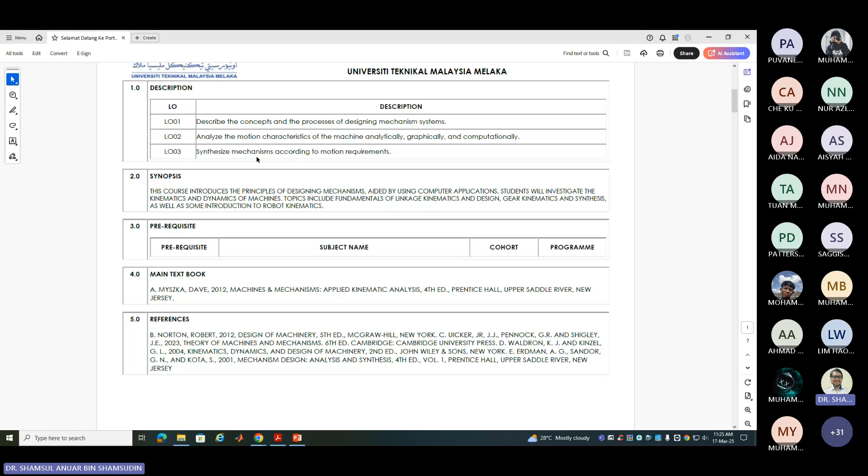Okay, nanti kita tengoklah what examples of mechanisms, and then you must be able to analyze. So analyze will involve a lot of calculations. So this is based on the motion characteristics of the machine, and you use several methods to be able to do this via analytical method or graphical method and also computational method. Okay, computational method will involve that you use computer lah, but nowadays maybe even your handphone or tablet can also do the work.

Okay, and the last LO is for you to be able to synthesize mechanism. So synthesize is another bombastic word for design, for you to be able to design the mechanism. Okay, so usually you are given ready-made mechanisms or mechanisms that already exist. So you analyze. But later on, at the end of the day, if you have already understood how to analyze it, you must be able to try to create a mechanism that will achieve what you want the machine to do. So that is the end game for learning anything.

So first, you must be able to just follow the recipe, and then finally you can create your own recipe. So that's the situation in any class or any knowledge. Okay, so as for the synopsis, I guess you can read. It involves some of the topics that we want to study, and I guess let's go down to some other stuff like maybe assessment. If I can get this thing to move, because this is a fairly old computer that I'm using, so it doesn't cooperate that instantly. Take its own sweet time to follow my instruction.

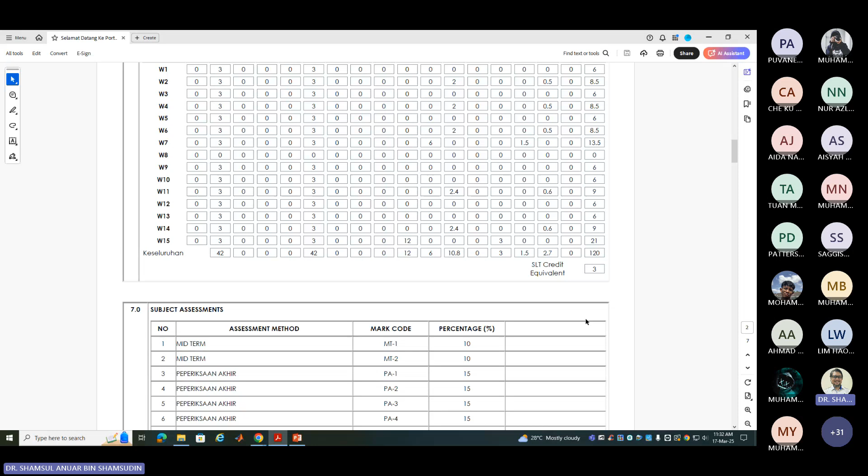Okay, so this is a 3 credit hour course. So our lecture is usually around 3 hours per week, but usually it's less than that. But like I said, you still need a lot of time outside of the class, outside of our meeting, for you to be able to understand the material.

Okay, for assessments, basically we have one midterm test, and in that we have 2 questions, giving a total of 20% for that midterm test, mid-semester test. And then we have this final exam where you get 5 questions and you have to answer 4. So that would be 60%.

And then I'll give you a bunch of assignments for you to enhance your understanding. So I think if you are able to do the assignment or the homework, I call it homework, that should prepare you to answer the questions in the test and also the final exam. Okay, I think that's the deal that I want to give to you. So is that a good deal or not? I hope it is. Okay.

Next, we want to talk about the planning. Like they say, failure to plan is planning to fail, something like that. Okay, but this is just a rough estimation, rough planning. We'll try to stick as close as possible to this plan, but there can always be some changes here and there.

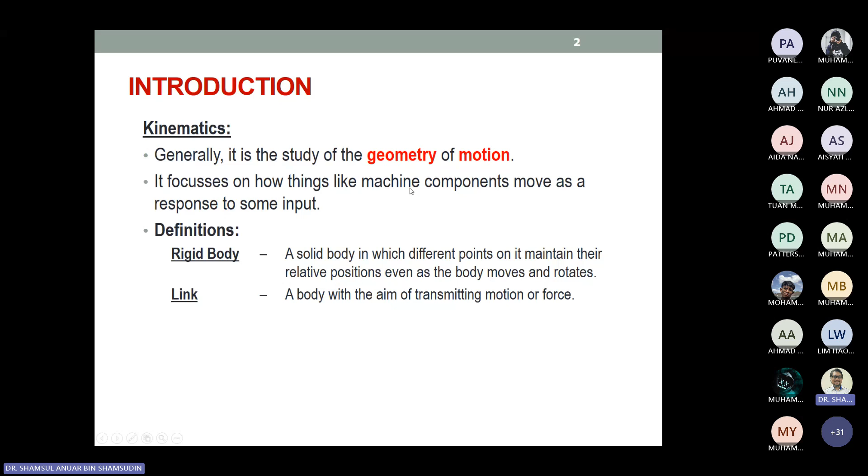Okay, so like you see, the term mechanism here is a little bit different from kinematics, but like I said, they are also used interchangeably. So sometimes you don't know which one is which, but basically they are talking about the same thing. But kinematics will put more emphasis on the geometrical mathematics of it, whereas mechanism will look at different methods to understand this thing and also to design it. Okay.

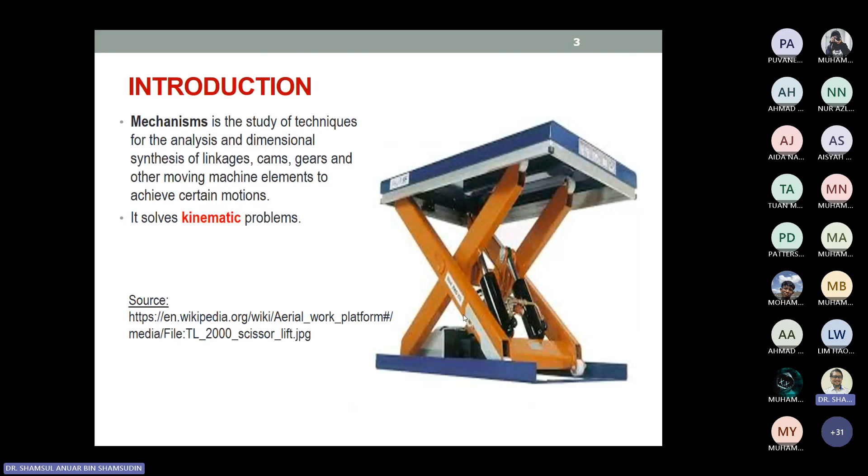Then we have this. Okay, so what are mechanisms? These are some examples. That one is also another example. So any machine that moves, or maybe you don't see the moving parts because they have a cover, like your car engine. You don't see the piston moving inside it, but if you uncover it, there are a lot of moving parts inside. So that means it is a mechanism. So all these are subsystems of the mechanism.

Why do we study linkage mechanism first? Not because it is easy. It is not easy. Therefore, I guess a lot of schools kind of avoid this topic. But in actuality, you see a lot of this in engineering work. So we don't want to have our graduates not equipped with this knowledge. So you want to be able to realize that this is important stuff.

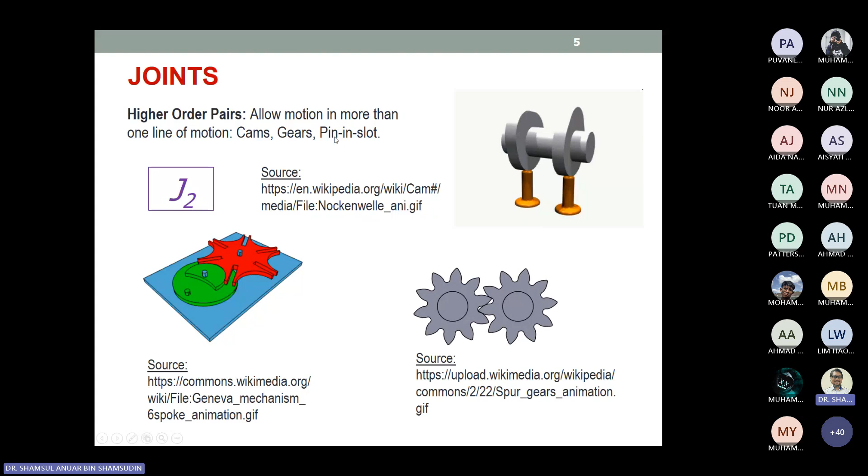Okay, so actually there's another one missing here. I should add screw. Screw also is included. Screw is also included. Why is screw included?

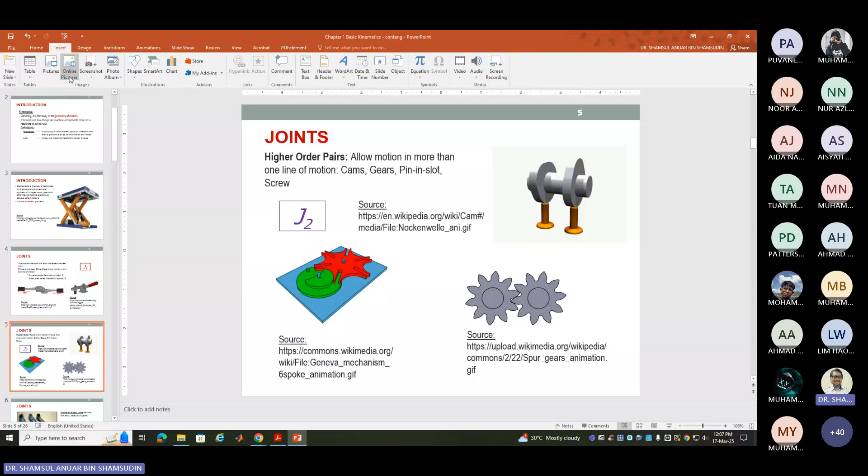Should I put SpongeBob there? Animation GIF. Bunch of GIFs here. Anything that involves screw here? Any Trump supporter here? Any MAGA supporter? Not there.

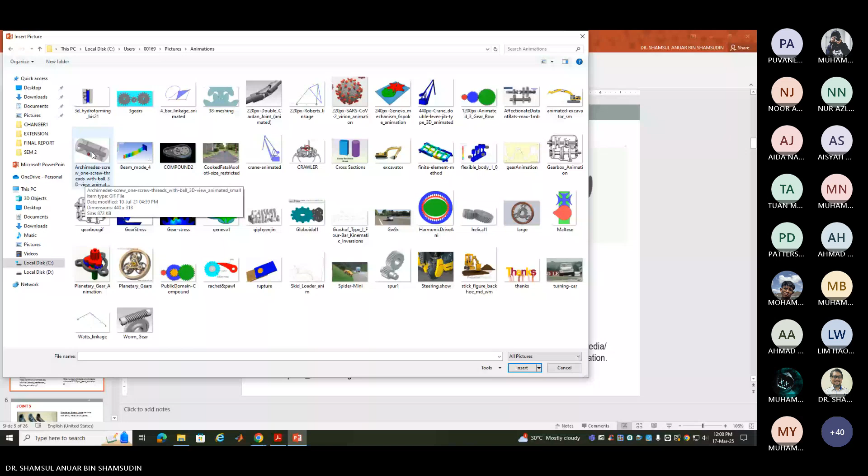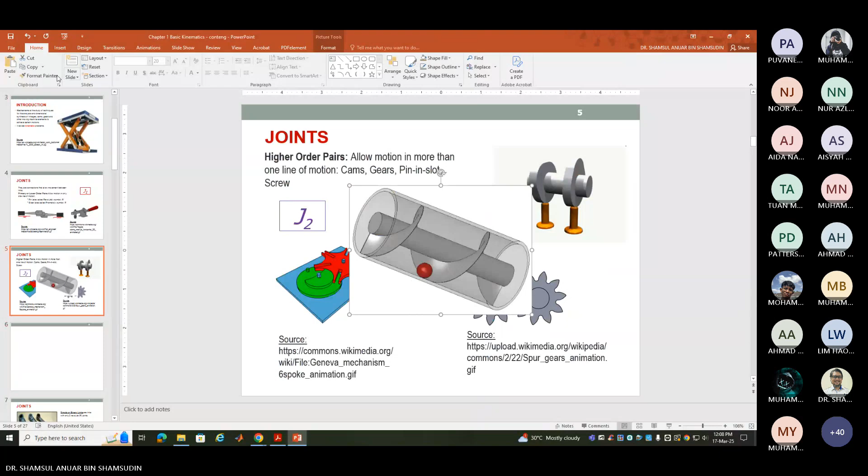Screw. Let me show why screw should also be included. Maybe not on this computer. But definitely screw should be there. Animation screw, and screw. Maybe I can use this one. For the moment, maybe I can just include this animation. Maybe add another. So this one, cut and put over here. Screw.

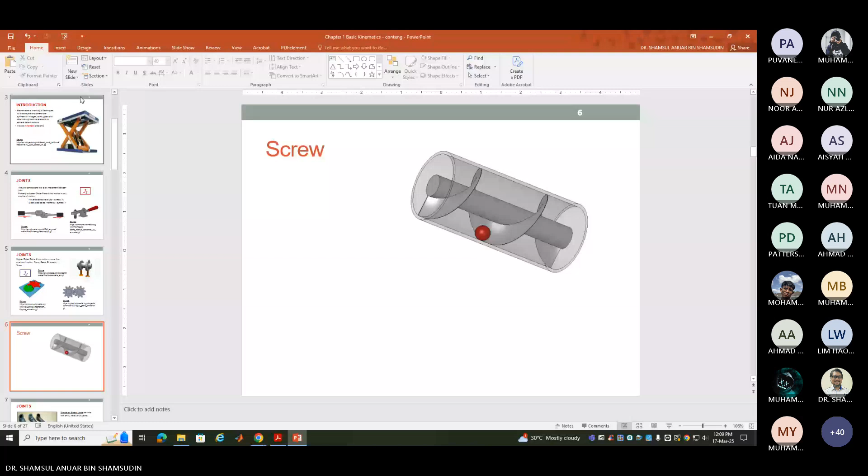Okay, let's see why screw is, but this one maybe has to also include another one. This one is almost like a screw, but it's not really a screw. It's actually a gear, we call it a worm gear, but I guess the base is also a screw.

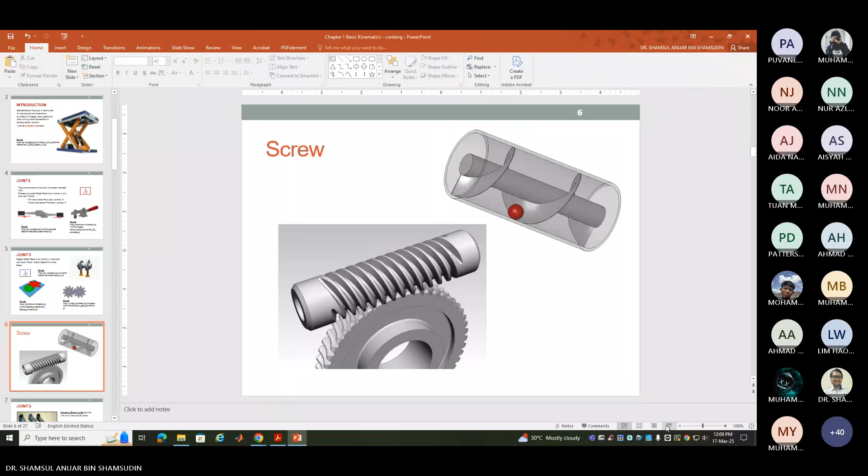Okay, here you see as this screw is in contact with another component, usually a nut, there is going to be rubbing or friction when they are in contact between the thread of one screw and the thread of the nut. And also at the same time it'll be pushing it. So there's two things happening there: rubbing or touching and contact, and also pushing.

Same here, as it is in contact, there's some rotation and also pushing. So that is what allows this circular gear to rotate. So that is the situation. So that's why this screw is also in the J2 category, same as the cam and also the pin in slot and gear.

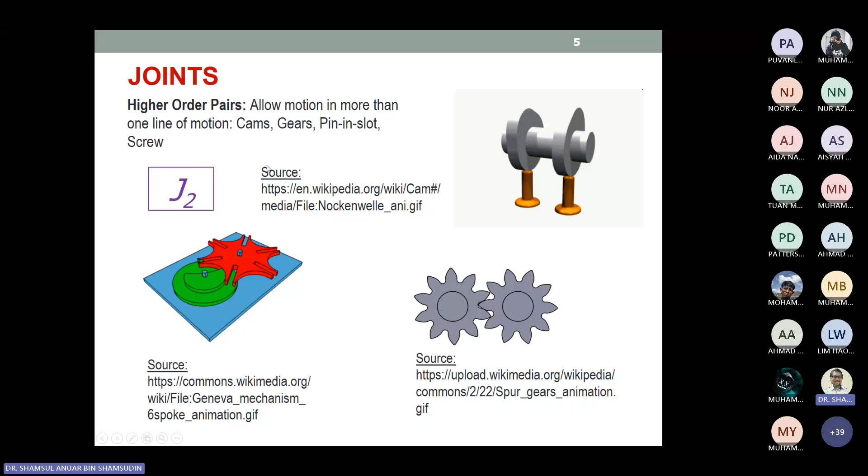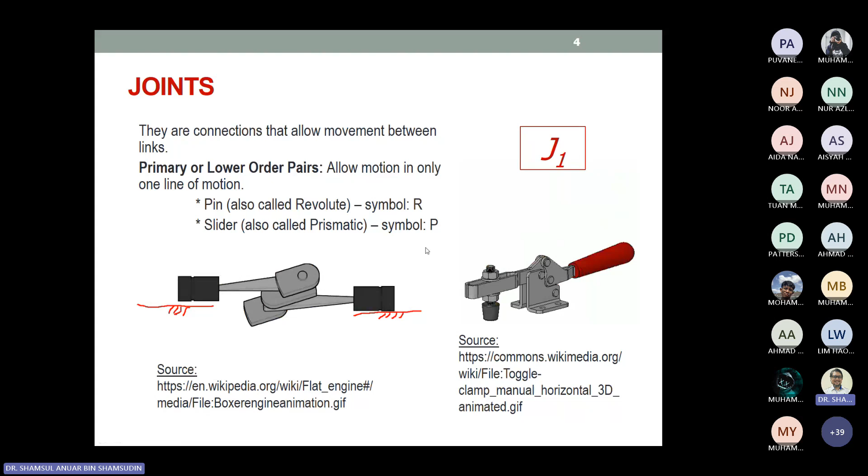So when we want to identify if there is any J2, ask yourself: do we see any cams? Do you see any gear? Do you see any pin in slot? Or do you see any screw? If you see only revolute or prismatic, then they are J1. R and P are J1. Okay, so this will be preparing you for the next part, which is when you have to use a certain equation to do some calculation.

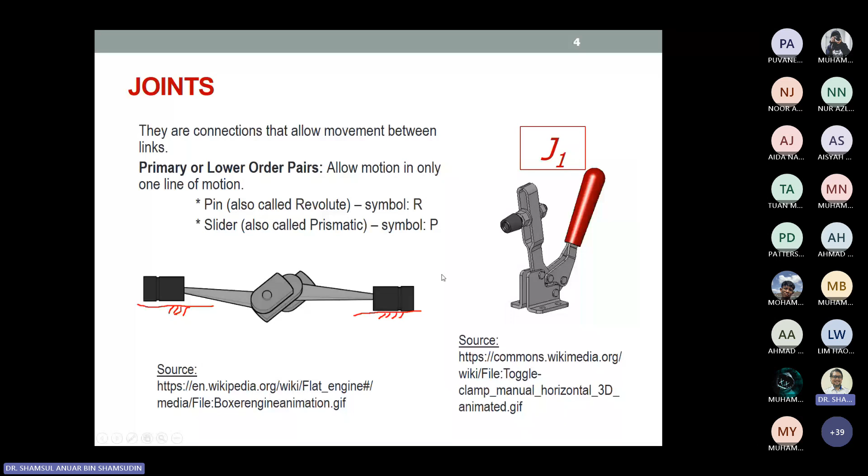Okay, sudah panas sudah makin susah. Awal-awal lagi dah susah ya, okay lagi ni. You guys, boleh still Doktor. Okay, can, okay.

follow me okay okay okay all right okay

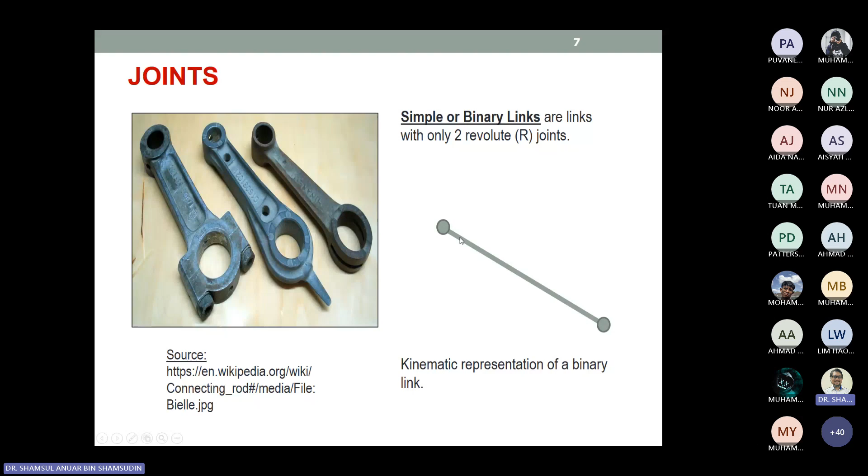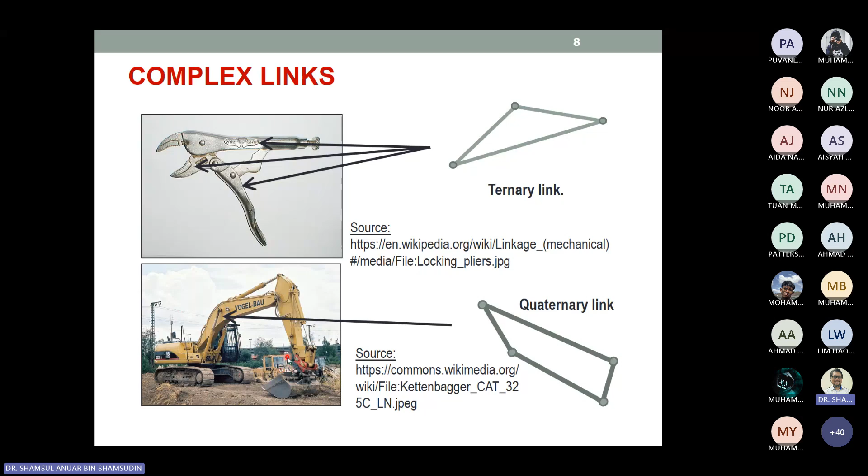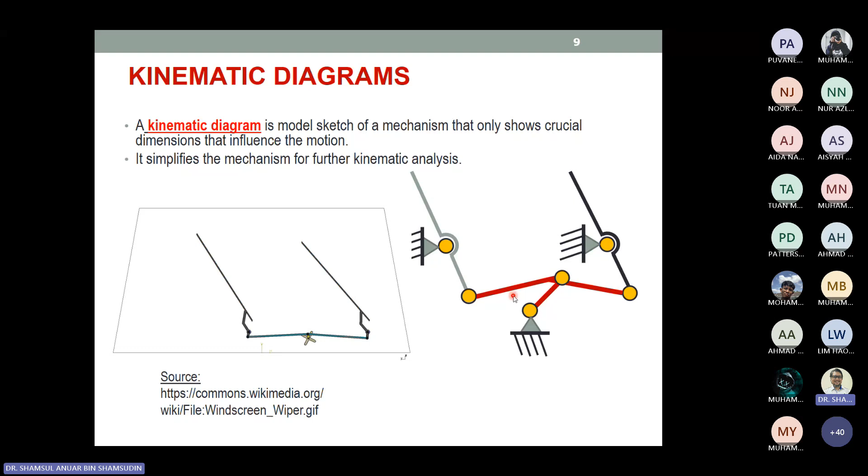That is the meaning of life. Okay.

The next part that will be used in the future when we talk about an equation, which is called the Kutzbach modification of Gruebler's, or simply the Gruebler's equation, is you need to identify the number of links and also joints. Okay, so joints that we consider are J1 and also J2. So that's why earlier we talked about how to categorize the type of joints. So you must know which type of joints fall into the J1 category and which ones fall into J2.

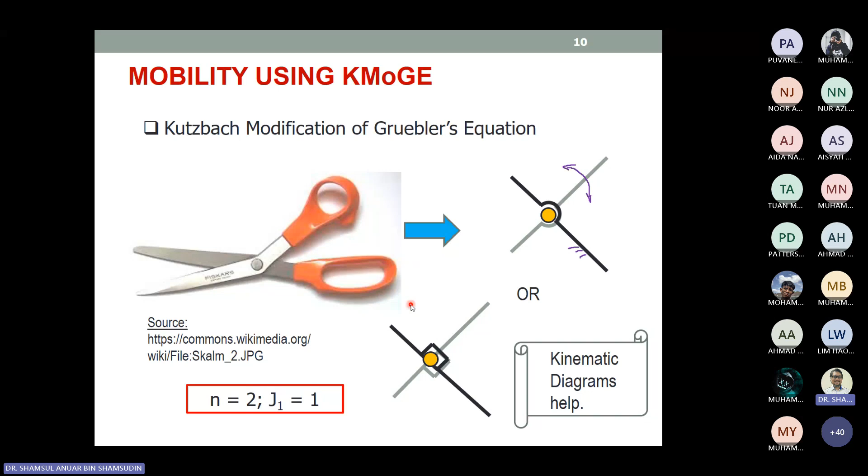Anybody? Anybody dare to oppose me? No, just kidding. Just kidding.

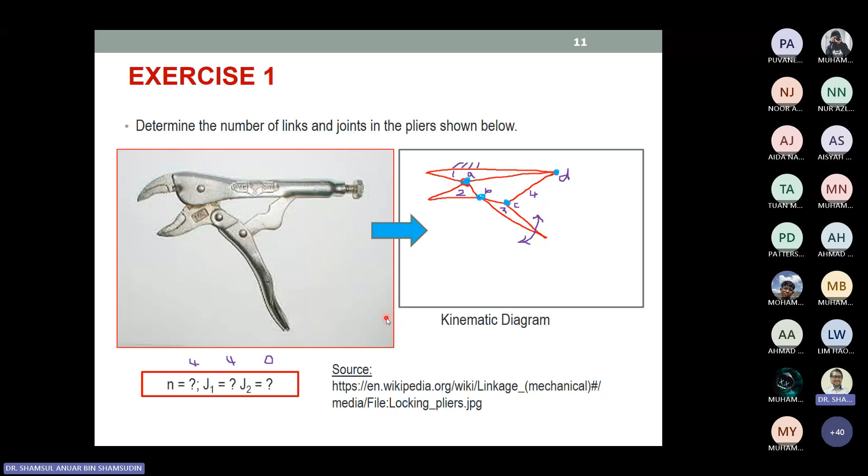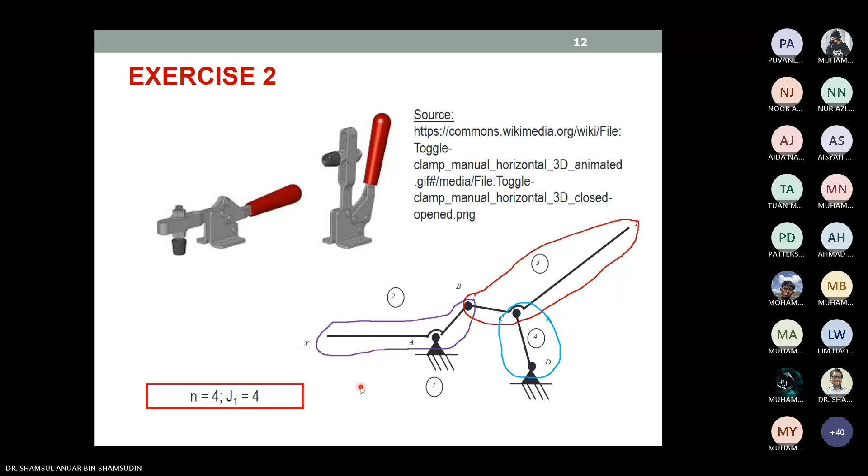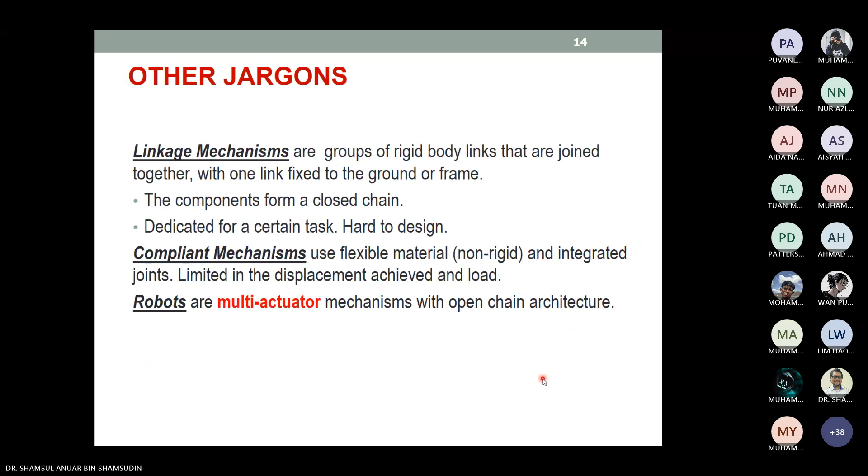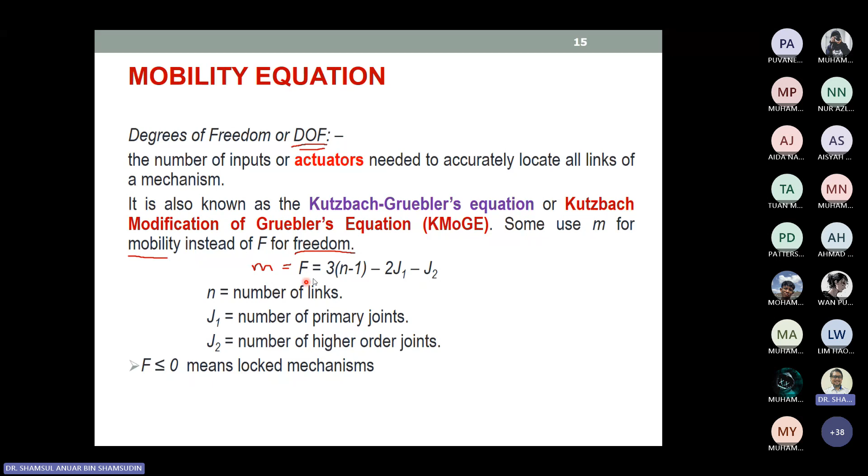Let's see, this one. F equals 3 times n minus 1, minus 2 j1, minus j2. Okay, so this is to find the degrees of freedom, or we also call it mobility. So drawing or sketching the kinematic diagram is for you to be able to identify n and also j1 and j2, so that you can use that to calculate how many degrees of freedom are involved.

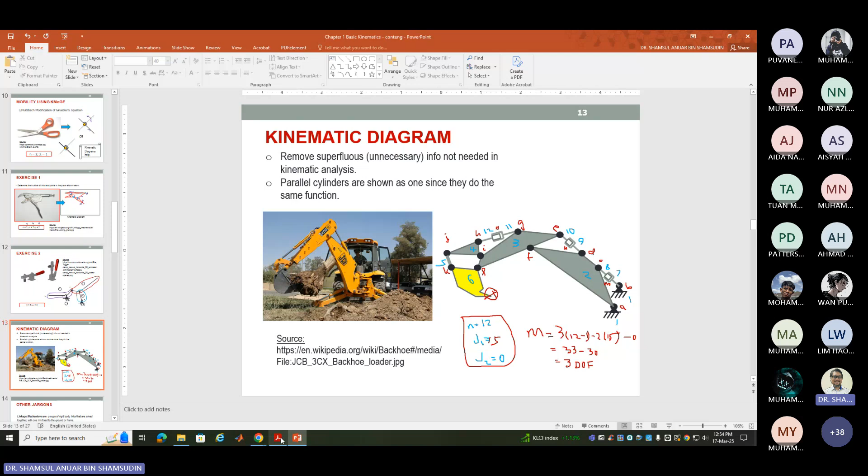So what do you guys think? Is it an interesting topic to study? It's about machines. I guess you guys love machines. That's why you guys are in mechanical engineering. Am I right?